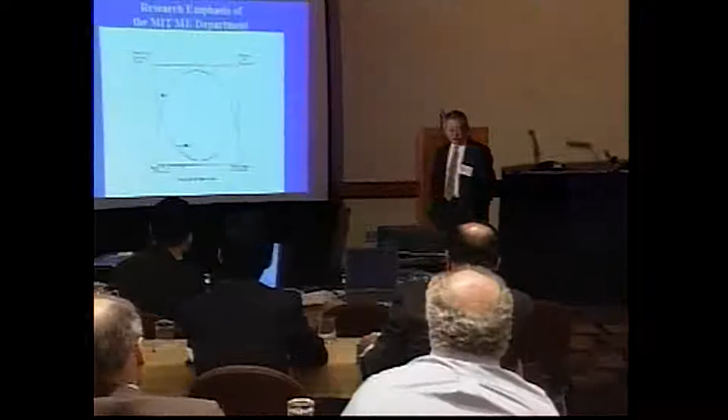One thing I should tell you about is our philosophy about research, which I keep talking about with anyone I can. If you plot a research spectrum on the horizontal axis, and then plot activity level along this axis, this is a research spectrum going from very basic or fundamental research...

You can define it any way you like, and this end is technology innovation, with activity level along this axis. The typical distribution is something like this: most professors and large numbers of researchers are in this middle area—I think 90% of our colleagues in universities are here. But if you look at the impact made by this kind of research, the curve is just inverted.

So I say at MIT, we should concentrate at this end and at that end of the research spectrum. We shouldn't really care whether someone is at this end or that end, rather than argue about what is engineering science and so on. There are all sorts of basic research one can do, and all kinds of technology innovation one can do. Some people are able to do both, some want to stay at one end or the other, and that's fine—let the middle ground be left to someone else.

So I guess one thing we need to talk about is: what is information? It can be defined in many different ways—to prepare these slides I looked up Webster's dictionary and there are many definitions. For the purpose of what I'm going to say, I say information is knowledge that must be added to achieve certain functional requirements. So information can be measured in terms of the probability of success in achieving those functional requirements.

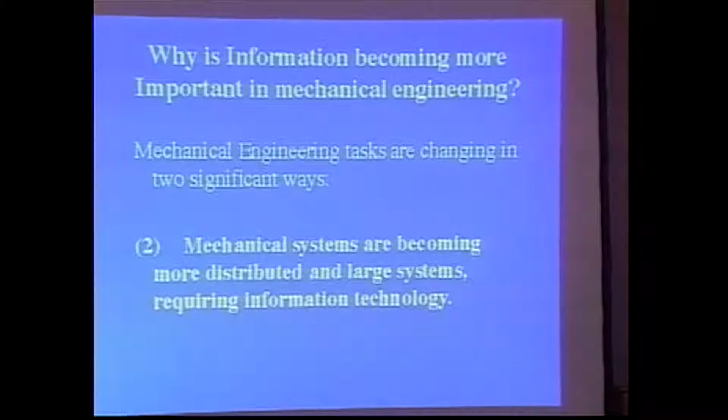The other thing that's happening is at the opposite end of the spectrum. Mechanical engineering is becoming very highly distributed. Factories are located all over. Design is done globally. You have to exchange information, with a large number of people in distant places working together to create the same final output. And that cannot be done without our understanding of networking, without understanding how design should be done in a systematic fashion, and so forth.

It turns out that mechanical engineers always dealt with information. We never called it information. We are always in the area of design and manufacturing. Essentially, these two fields manipulate information to create artifacts. That's the business we have been in, we just did not call them information.

So I'll give you a short, very simple example of how we evolved. In my own research, we evolved by asking some very basic questions, how one goes about designing simple things up to large complex systems, and how it resulted in a complete new technology for creating software, as well as many other things.

It turns out that in axiomatic design, there are only two axioms. One is called the independency axiom, the other is called the information axiom. It requires that the functional requirements must be independent throughout the design process, and we have to define what we mean by functional requirements and so forth. The other axiom says information content must be minimized during the entire design process. A very simple statement. From these, we have a large number of theorems, corollaries, and so on, which can be used by students in coming out with good design.

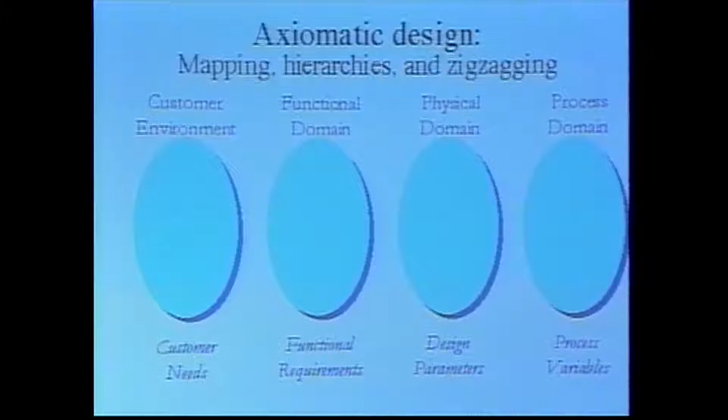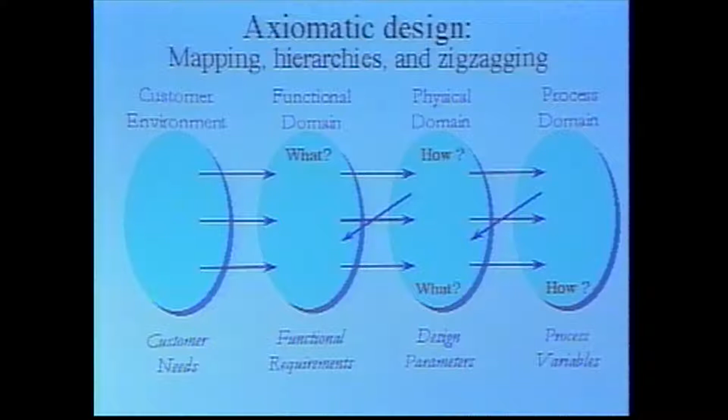In axiomatic design, we talk about mapping from domain to domain. First, we assume there are four domains: customer domain, functional domain, physical domain, and process domain. Then, as a next step, you have to map between the domains, and when you map between the domains, you have to maintain independence of functional requirements. That is, you have to maintain independence from what it is you're trying to achieve, from other things you want to achieve.

Then you have to zigzag and create a hierarchy. You cannot decompose something by staying in one domain; you have to zigzag, so the only way you can decompose is by zigzagging. Then you can create a hierarchical structure in each domain. The independency axiom tells you which are the good designs and which are the bad designs, and it gives you a procedure to follow in your design to satisfy these axioms.

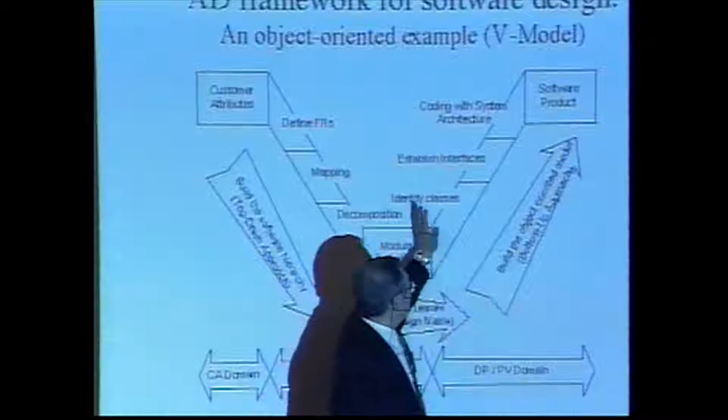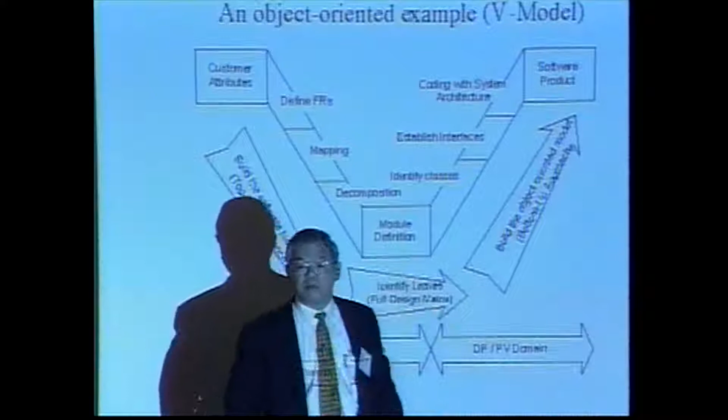So applying this idea to software, it looks like a V model. We go from functional domain to design domain, and that's one leg. Going from design domain to process domain is the other leg in software design. We design along this leg first, and this is typically very equivalent to object-oriented programming. By doing this, we create the structure of an object-oriented program without any human intervention. So you can think of creating software without much human intervention.

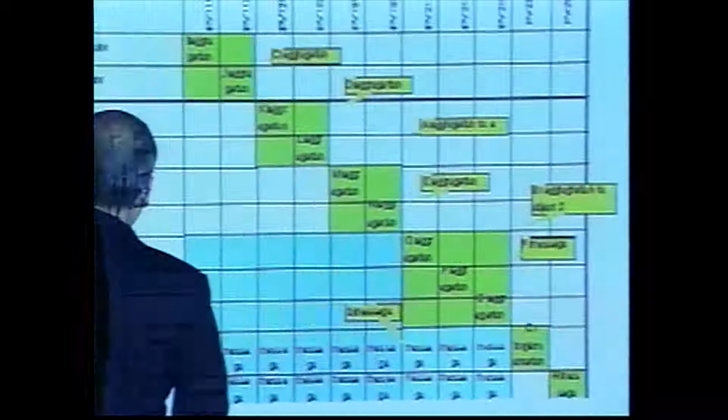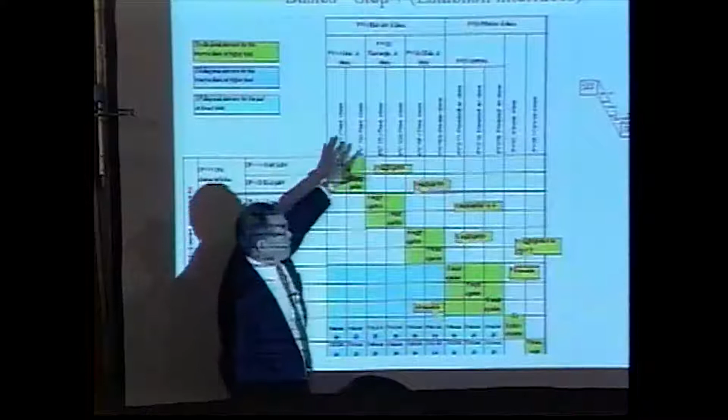As a result of this kind of thinking, as you design, you have a matrix. These are functional requirements, and these could be the design parameters. In this case, we're showing design parameters versus process variables, but you can plot the same thing where this is functional requirement and that's the design parameters.

These are what people might call object-oriented programming. This is what you call an object. That is data, and this is a method. So in terms of object-oriented programming language, that's the way it's going to be.

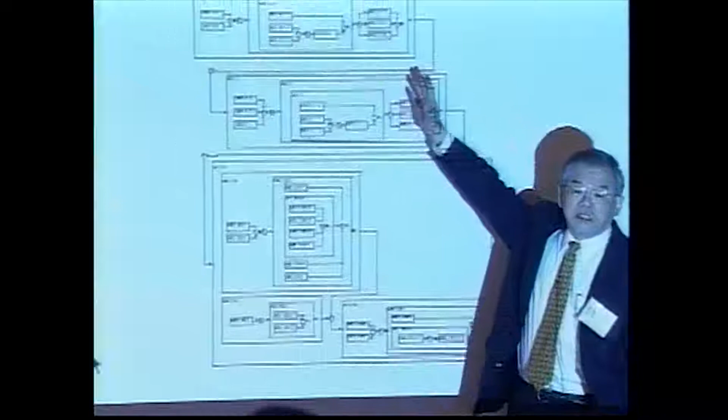So the result of this, without spending too much time, is something like this. This is like an electric circuit diagram. Each one of these little boxes are the modules at the lowest level, and the module we define is very specific - it's a row of the design matrix. The result is a diagram we call a flow diagram, just like an electric circuit diagram - instead of capacitors and resistors, we have these modules.

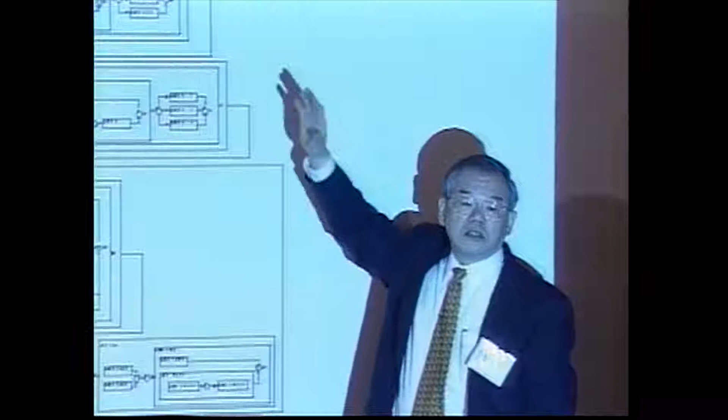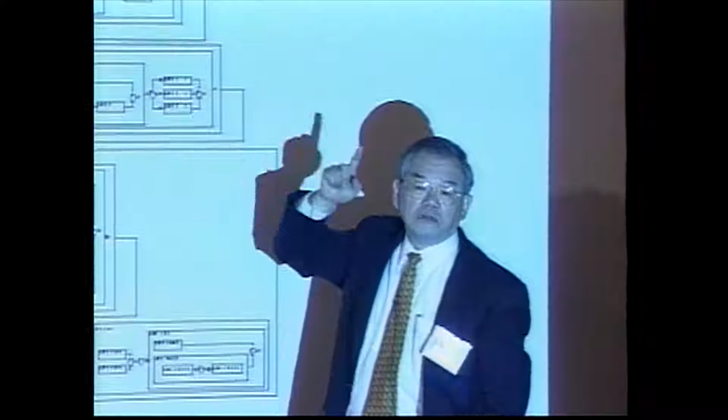It turns out this is generated automatically once you do axiomatic design. With a click of a button, you get this whole thing. Then the only thing the programmer does is stick in the modules. Because this is a row of the design matrix, the programmer who works on this module can be located in India, another in Boston, and so on. All you have to do is stick them in there, just like you pop in resistors or capacitors, and then you have software.

I teach this right now to graduate students in my axiomatic design class. One of the students is a PhD from MIT who worked for Xerox for about 15 years - he came back for a master's degree in the Systems Design and Management Program. I have another student with equally long experience in software design at Xerox. They tell me that the way we did this took only 20% or less of the time it normally takes at Xerox for the software we developed.

They know the software very well because they play with it and work with the people doing this. In the case of hardware design and machine design, I was talking to the president of SVG the other day, Bill Hightower. He really thinks we can cut down the time it takes to develop new machines by a factor of two - what used to take 30-some months, you can do in 18 months or so. So systematic thinking, having a very rigorous criterion for good design, enables us to do this.

The purpose of talking about this is not only to tell you about my own work, but the fact that we started out with very basic research, asking the simple question of what constitutes a good design. Having done all of that, now we can apply it to software design, hardware design - this is technology innovation.

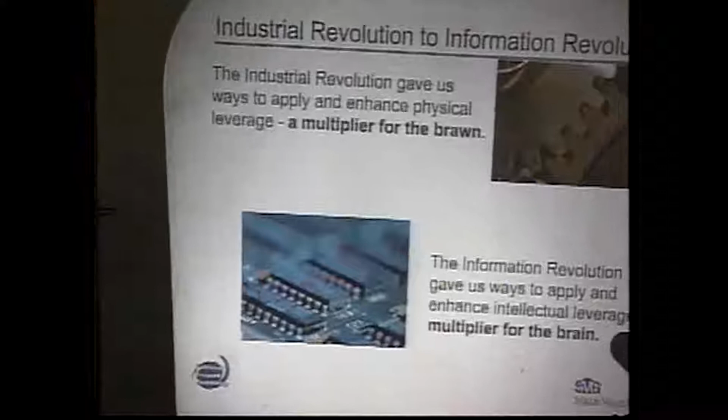In the old days, we really had gears and mechanical engineering, and what we call the multiplier for the brawn. Mechanical engineers basically created leverage so that human beings could lift large weights. Nowadays, of course, mechanical engineering is empowering what we call the brain. Next one, please.

As Professor Lloyd said, mechanical engineering is at the core of information technology today. You cannot make semiconductors without mechanical engineering, frankly. There's some chemical engineering, some material science, and other disciplines, but fundamentally, to get down to the small geometries and really measure a lot of these things, mechanical engineering is at the heart of it.

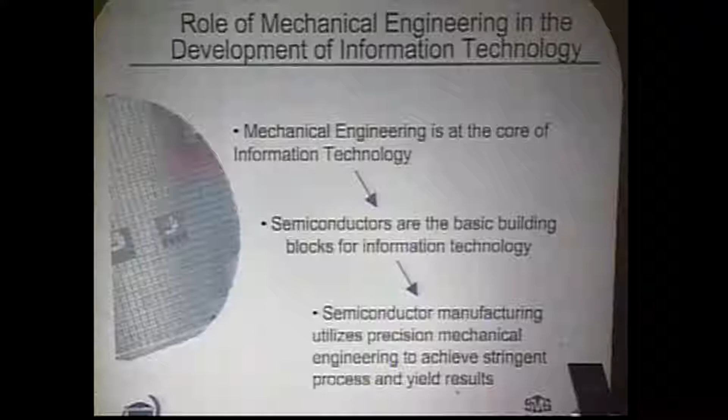Our company, frankly, I will say this: you cannot make Pentiums, since 1994. Every Pentium, most of the Pentiums are built on our machine, and every generation of Pentiums advanced from 120 megahertz up to 1 gigahertz now, the only way you can get that is to make the lines thinner and put more transistors on it. We at SVG are the enablers for that basic technology, and I'll show you how that works. So we are extremely important for the whole internet and information technology.

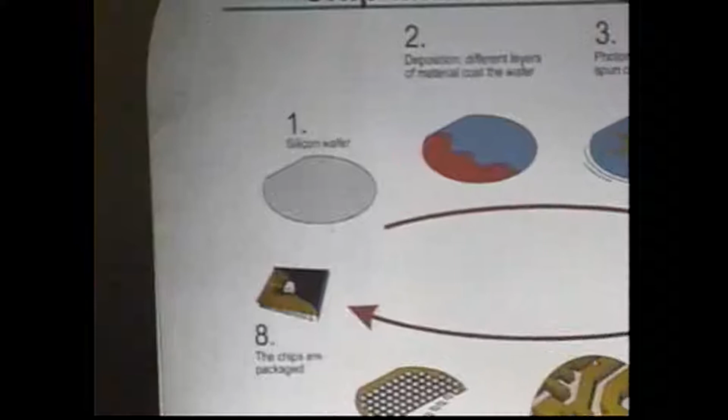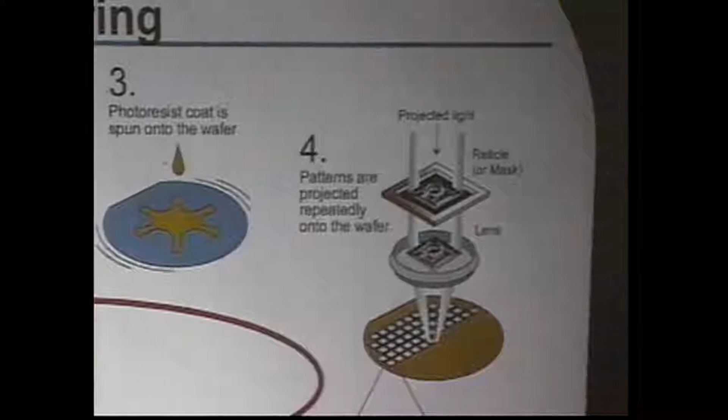Next slide, please. For those who have not followed the semiconductor industry: basically you take a big ingot -- in fact I've seen at MIT a place where they used to grow ingots, and they gave it to IBM. You take that ingot, you saw it first, a mechanical engineering problem, then you spray photoresist on it, which is another mechanical engineering problem. How do you spray something that's kind of viscous smoothly? You've got to get accuracies of plus or minus 20 angstroms, on a 1 micron thickness.

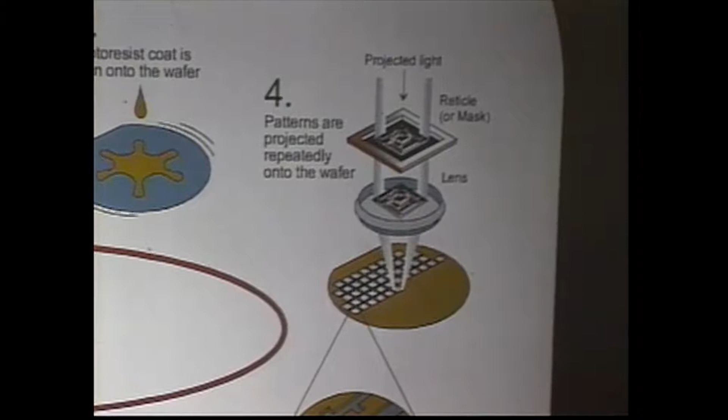So what we used to do in the old days, we used to charge a huge capacitor and suddenly put it on the motor, and the motor really spun it very fast so that you could get acceleration very fast, so that you could really get a good flow.

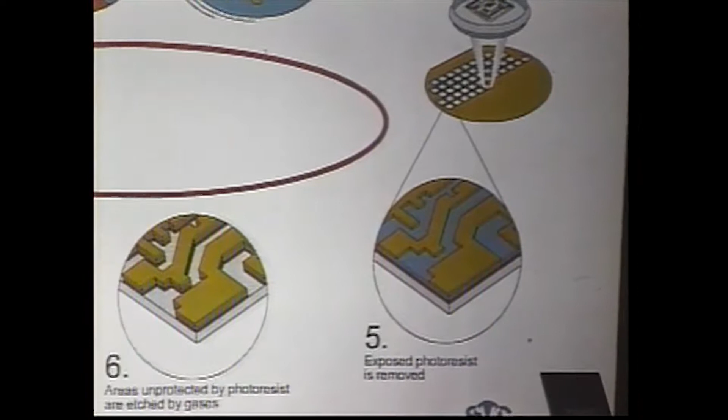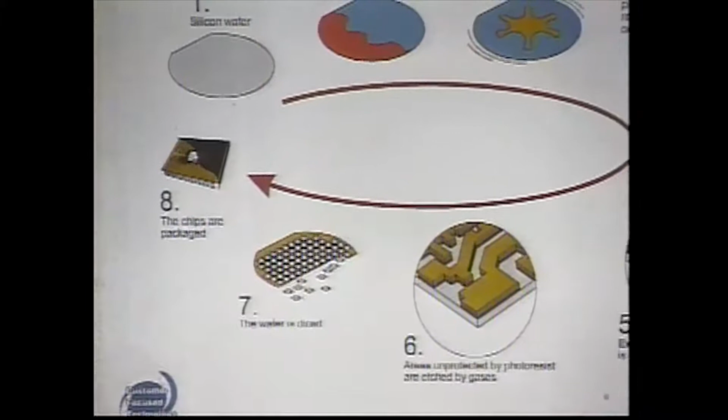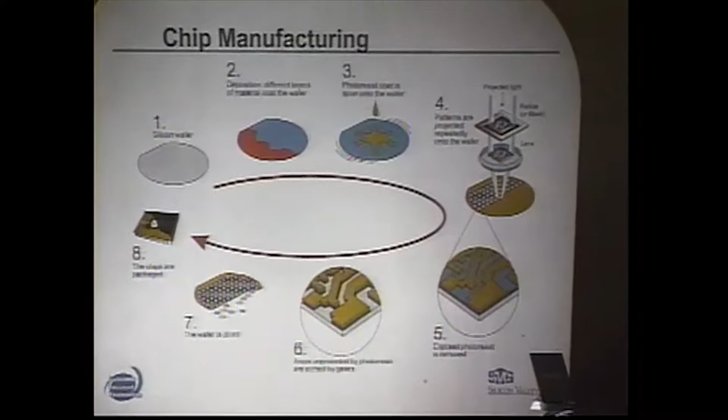Then, after that, you project the image, which is another mechanical engineering piece we make. You have to project real tiny transistors. In the old days it used to be 5 microns; now 0.18 micron is the technology today in production. Then you develop it, and then you etch it, you put some other stuff in it. There's another mechanical engineering piece: we make furnaces where basically it's a heater, and you put some gases in it, and you have to make sure there's no stagnant flow. You have to flow it properly -- another mechanical engineering phenomenon. You make sure there are no particles and you have smooth flow, another area of mechanical engineering. So I really think mechanical engineering goes into all of it.

Next one, please. Lithography, of course, is basically the most difficult and most important part of making semiconductors. That's the ability to put the finest image on the wafer. And if you can't do that, whatever you etch, whatever you develop, whatever you do is nothing. That's the basic enabler that gets to thinner and thinner lines.

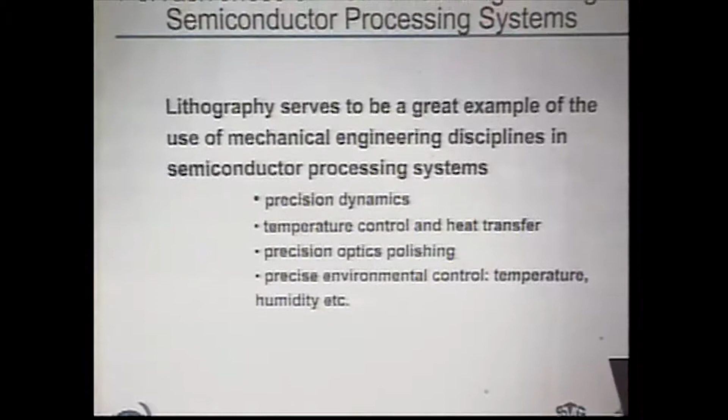And believe it or not, optics, fundamental geometric optics that's taught in 2 or 3 weeks, that's all we use year after year for the last 30 years. So whatever you learn in 2 weeks, maybe you should amplify it a little bit with some applications so people can get better at it. And like Professor Su said, the physics department -- I think that's very elementary, but when you really start using it, really making machines with it, you find out it's not that elementary. Things get very, very difficult.

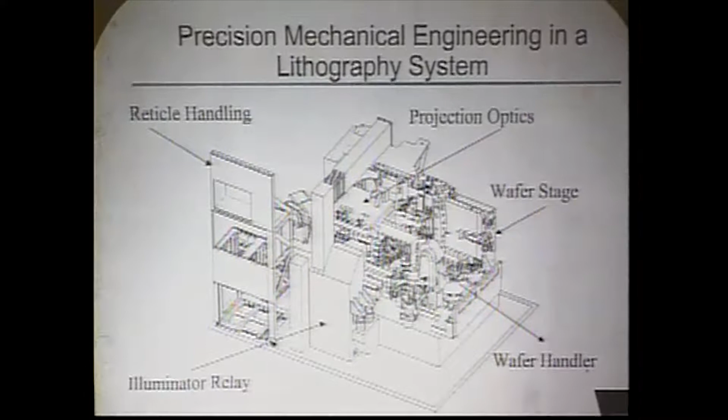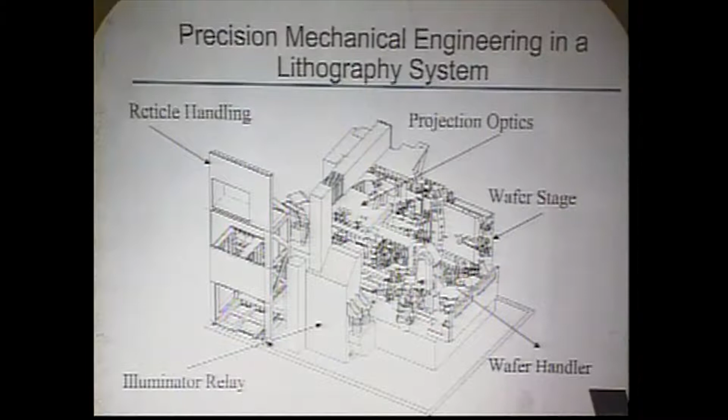Next one, please. This is a sketch of a typical machine. It is amazing sometimes that the damn thing works at all -- frankly, it's just so accurate and so precise. Just to give an idea, we actually print 0.1 micron, and the accuracies are within 0.01 microns. So you have to make machines that measure 0.01 microns, because you cannot buy these things.

And these machines, these carriages have to accelerate. Just to give an idea, these things run about 100 wafers per hour, so about 1.5 wafers per minute. In 60 seconds we have to take a wafer, put it in, take it out, put it in, and then put about 50 or so dies on it, take it out, all accurately, and you have to do this. So these are very, very fast and very accurate.

Everybody can do things slowly. But when you start, you basically have to hit the machine and stop the vibration and do it. I used to make disk drives before at Hewlett-Packard, but disk drives compared to this -- we used to always argue about how fast you can accelerate something and stop it. We found out that when you accelerate something, that's okay, you can get there, but then it vibrates.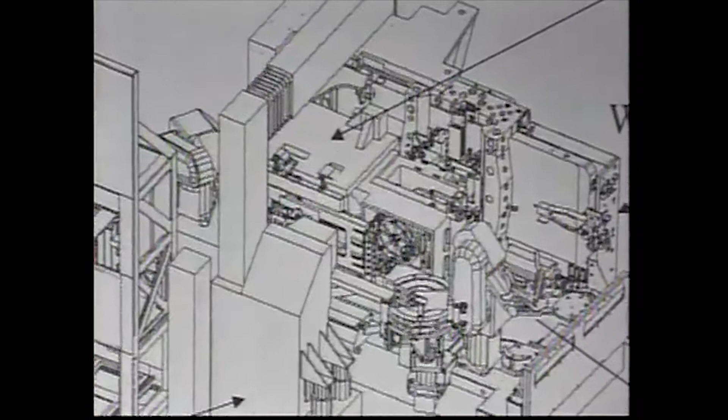So how do you stop the vibration before you can start reading or printing? In disk drives, the settling time sometimes is much longer than the access time. We have to align things accurately, wafer to wafer, layer to layer. You have to do 26 layers on top of each other, and align it within 0.01 microns. The difference between physicists and mechanical engineers is that physicists talk about it, mechanical engineers have to do it.

That's for Professor Lloyd.

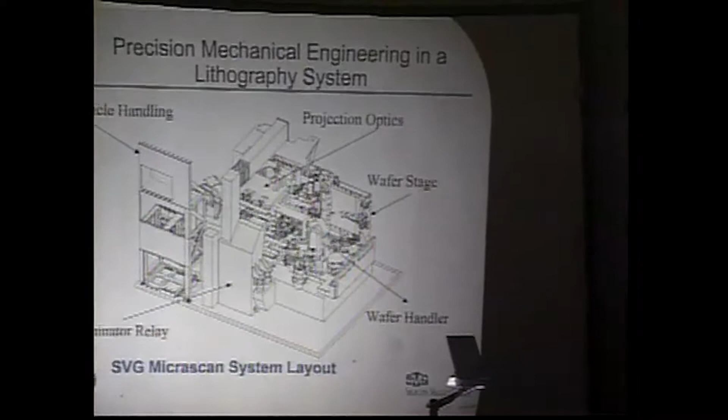These things really have to go. I was at a meeting the other day, and I pointed out that when we went to the moon in 1969, the computers we used were so elementary compared to today's PCs in terms of power. Those astronauts literally had to fly those things with their feel, you couldn't see it very much. It's amazing we were able to do that at the time. The amount of computer power we have today compared to the 60s is just incredible. In 1965 the IBM 360 was invented, so by '69 there wasn't much technology, and PCs didn't come in until about 1981, 82. They were 8-bit machines, very, very slow, elementary.

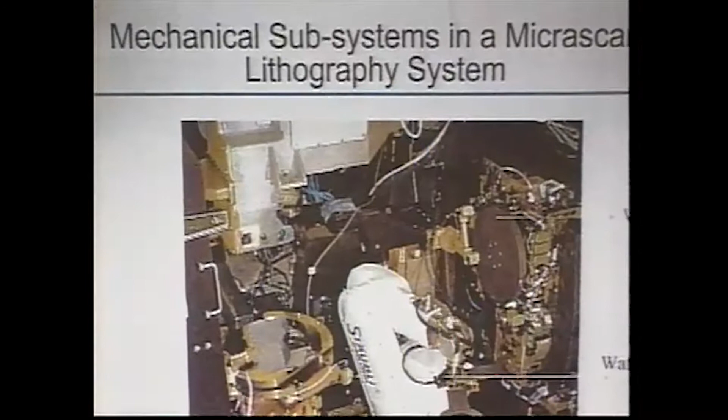So next one, please. This is an actual picture of that schematic diagram where we use some robots. Frankly, these materials have to be very light, very stiff, damped, and very accurate. And we do this actually. Believe it or not, these machines do exist in production. Next one. And they are making wafers every day, and that's what enables the whole information technology.

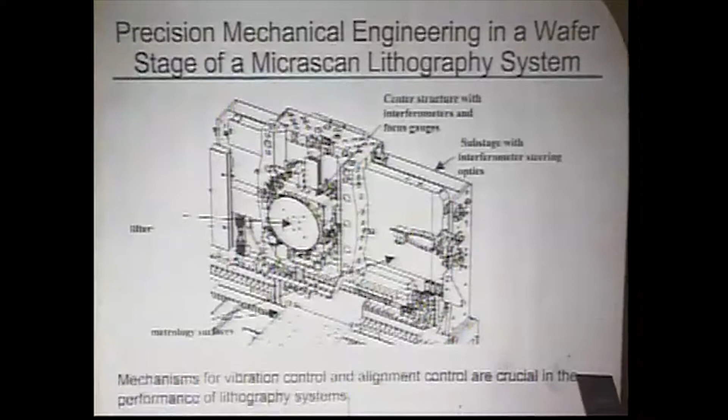There's another picture of what a wafer is. These are 8-inch wafers, and we're going to 12-inch wafers. Handling and making a 12-inch wafer, and making a smooth photoresist on it at 10 to 15 angstrom accuracy, you can see it gets much more difficult.

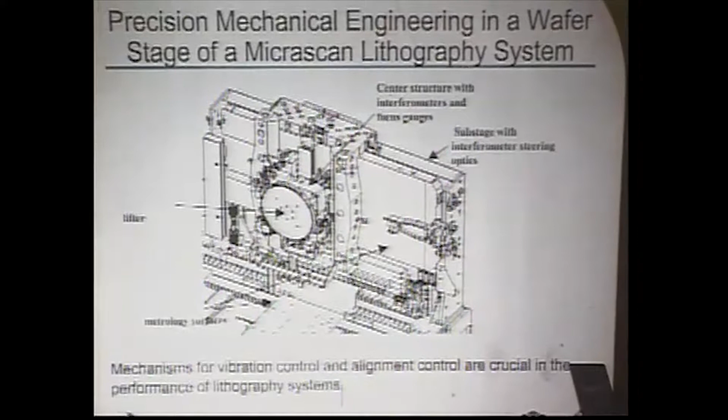We are working very closely with MIT, because the knowledge today is, we don't have all the knowledge, and we really try to tap on the knowledge at the university so we can get the best technology available. I'll show you some slides later as to why it's so important for industry to work with a university today, whether it's MIT or Berkeley, because information is transferring so fast that the days when researchers made something, wrote papers, and 10, 15, 20 years later it went into industry by osmosis or diffusion, whatever it is, is no longer valid. You really have to get the latest technology instantly, and the professors need to work with industry to find out the real applications.

Nam tells me many times when he comes to visit us and sees the machines, he thinks of 10 ideas, and his students and professors too, because a lot of times we're trying to accomplish something and we're in a foxhole, we don't see what's going on. Then a professor or student comes in and sees things we're doing wrong, or that we could do better. That's another interaction that's necessary between industry and university today.

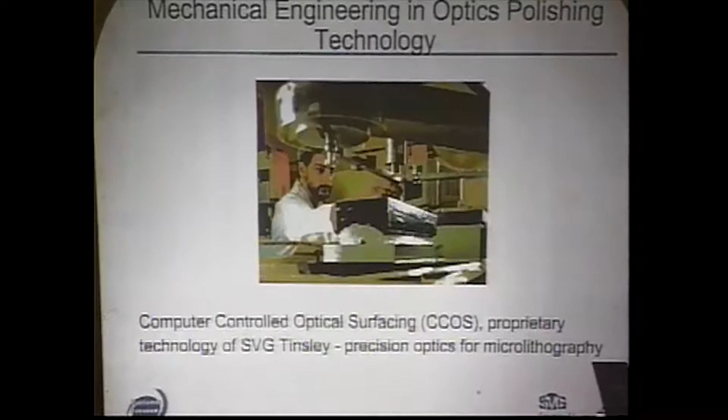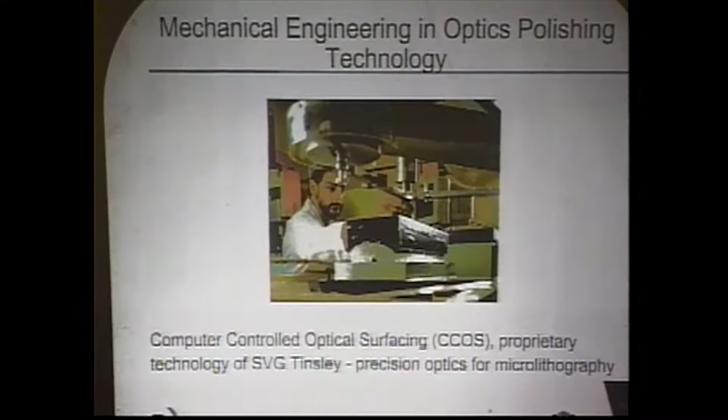And another one. We use optical polishing to 1/300th of a wave. We used to use old German opticians, because we don't even make opticians in America anymore, to really polish these things and measure them. But now, believe it or not, in Richmond, California, there's a company called Tinsley, which we purchased. They developed a computer-controlled method where they are measuring while they are polishing, with feedback. We can do spheric as well as aspheric lenses, and this was really done here, probably the best place in the world where we can actually do aspheric lenses very accurately by computer-controlled optical polishing.

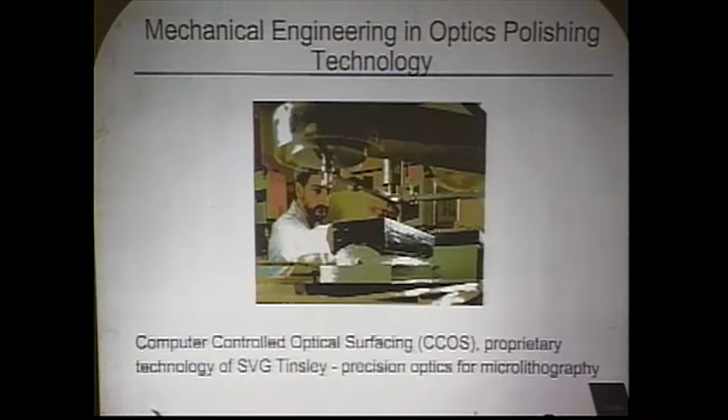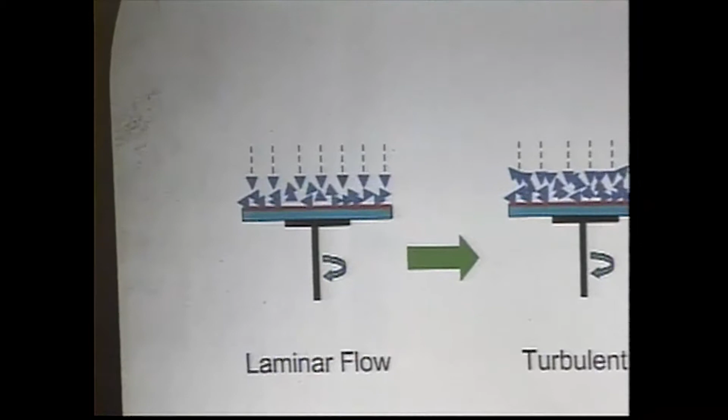Next one, please. This is a picture of how when we rotate the wafer and put photoresist on it, you can see all the flows and pressures that occur when you want to make this thing very, very thin. The reason you have to control within 10 to 15 angstroms is because every chip is about 1 to 2 centimeters square, and you have to make sure every part of that wafer has a uniform flow. Otherwise you don't get the speed, and you don't get critical dimension, or CD, control accurately if you don't have the thickness right, and therefore you don't get good yield. Yield is the name of the game in this business.

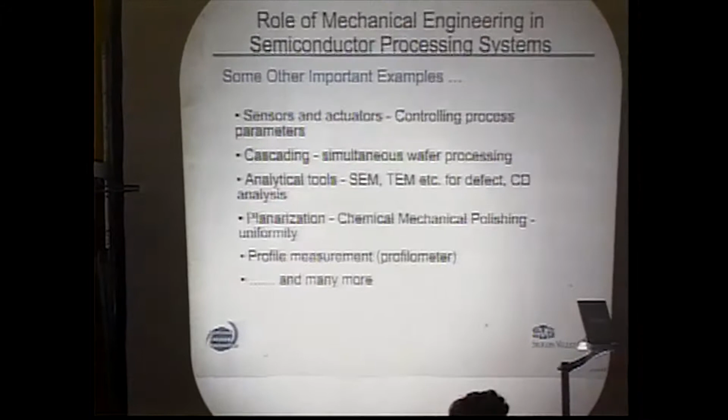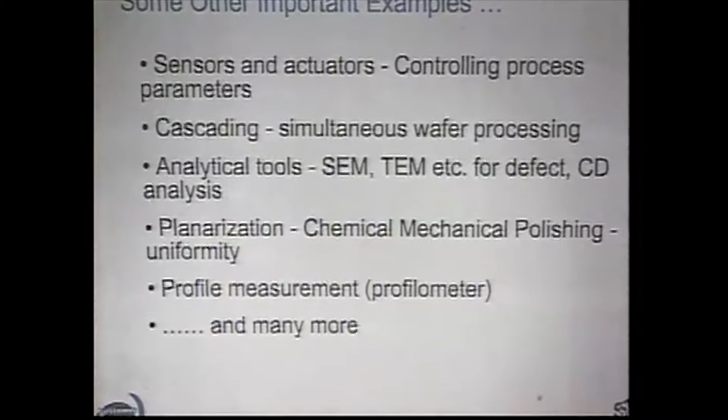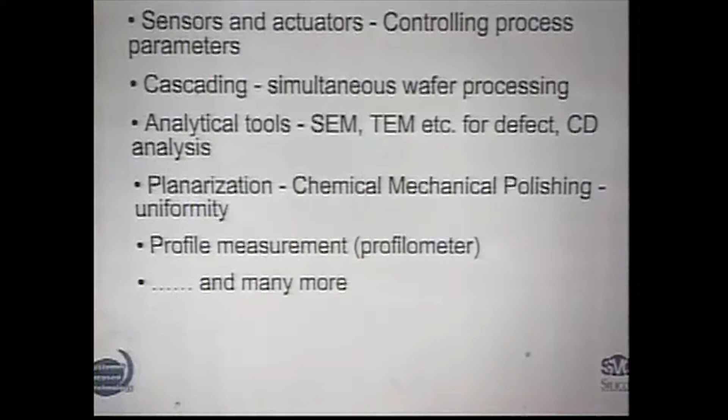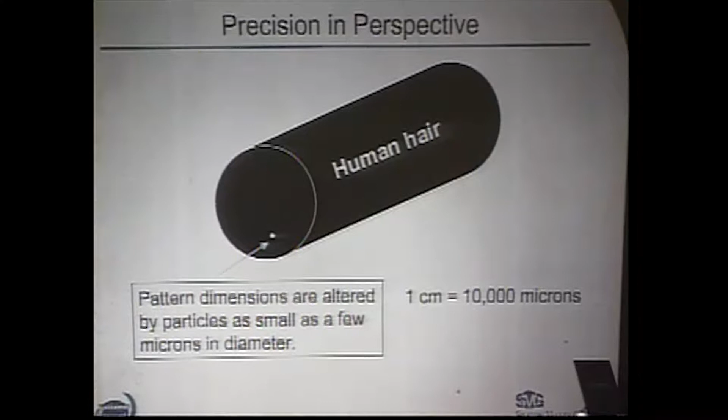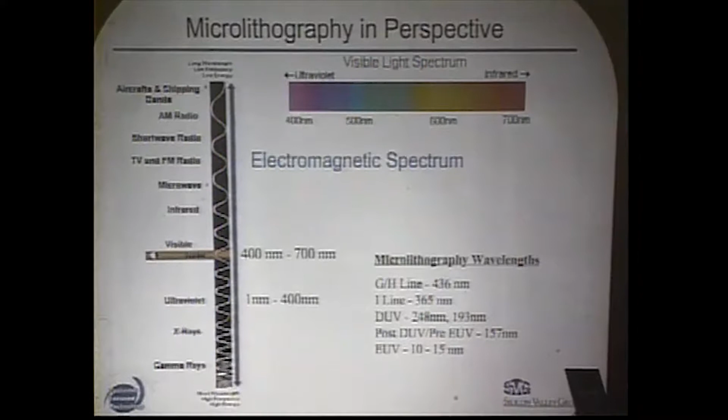This electromagnetic spectrum gives you an idea. Basically the G and H lines are 436 nanometers, and the I line, used until about 5 years ago, is 365 nanometers. We are using 248 nanometers now, moving to 193, and of course next is 157 nanometers. That's basically the source of light.

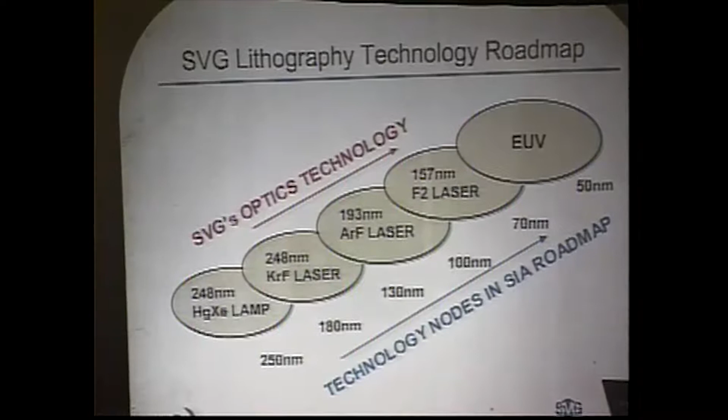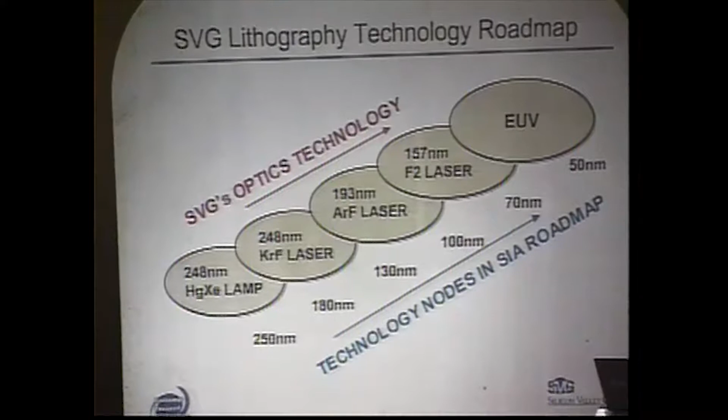As I said, our company is the leading producer of lithography. We really do deep UV, beyond UV, lower than 4,000 angstroms, or 400 nanometers, which is visible light. Then we're going to 193, next is 157, and then EUV. These are all optics until about 2006 or 2008—we're still going to be using geometric optics. People want to know when the technology is going to stop. We're still using optics; EUV can start us considering whether we're going beyond optics. There's a lot of discussion now in universities whether we should move to the next stage—working on human cells or tissue instead of silicon. But right now, I think for the next 10 years we'll be using silicon and optical techniques.

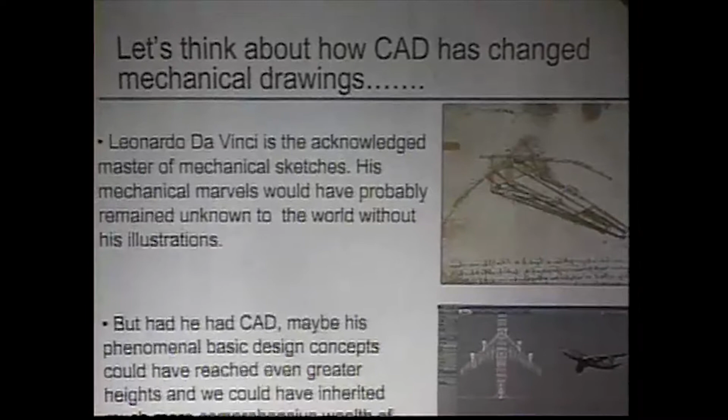As you know, if Da Vinci had computers and CAD systems, you can see that his innovation was not any worse than what we do today, except he didn't have the tools. The tools we have today, like the axiomatic design we use, really speed things up and make mechanical engineering life very easy.

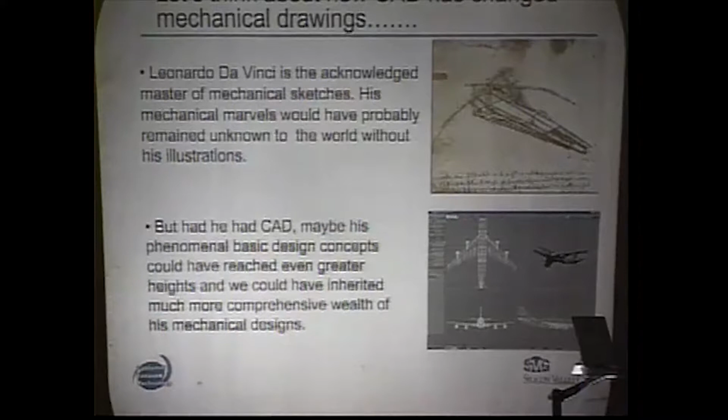For example, when I was designing things, we used to make parts that fit together. Sometimes we made mistakes and parts didn't fit—very simple, the holes were in the wrong place. Today, you can actually do this on CAD, simulate it, and make sure they're in the right place before you build it. Equally, most of you work with software, and software has the same incompatibilities as hardware does. Most of the time, software guys get away with it, selling things that are not finished. Unfortunately, in hardware, you can't.

Your computer suddenly freezes. You put a new application program in, and the damn thing doesn't work. What happens? There's a software incompatibility, but software guys don't admit that—they say it's a user problem. That's why they charge you 15% a year just to maintain it.

But those things can be addressed by axiomatic design. It's really nothing but a replacement for a good engineer—if you have a good engineer who thinks clearly, you probably use axiomatic design mentally anyway. But axiomatic design makes a good engineer a great engineer by showing systematically what you have to do and avoiding potential problems and conflicts.

Like I said, now we are using PCs, we have computer networks, and we're using the internet for sharing data and sharing knowledge. We used to use picture mail and other things through the television, it didn't work. Now we have to use the internet. You can share data online instead of waiting for a long time. Mechanical engineers now use that.

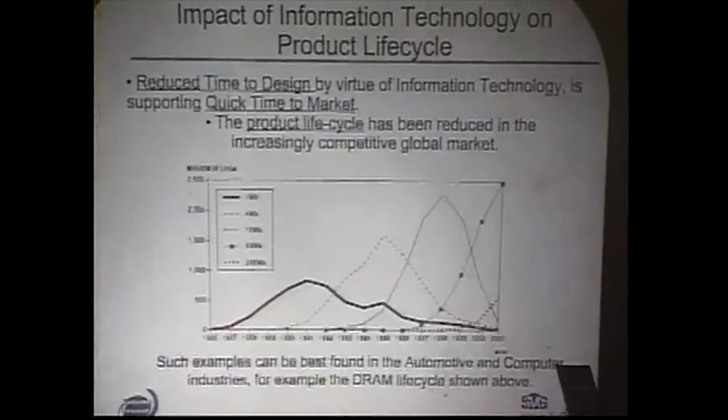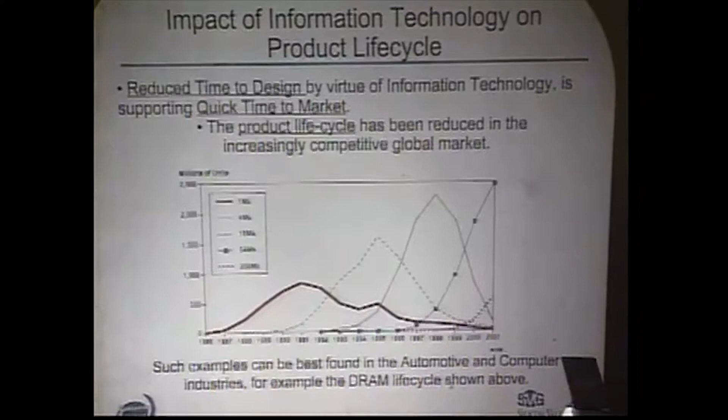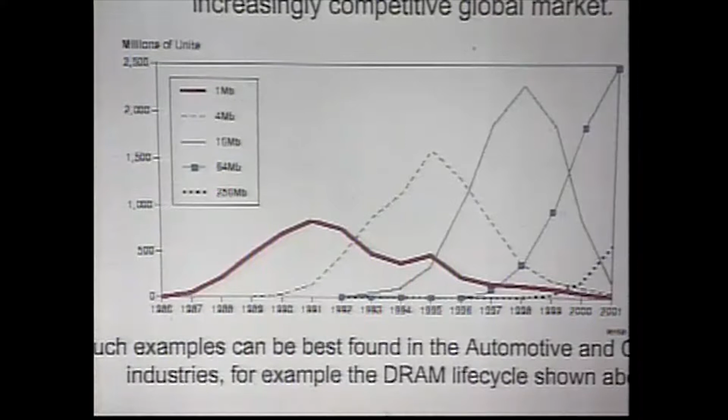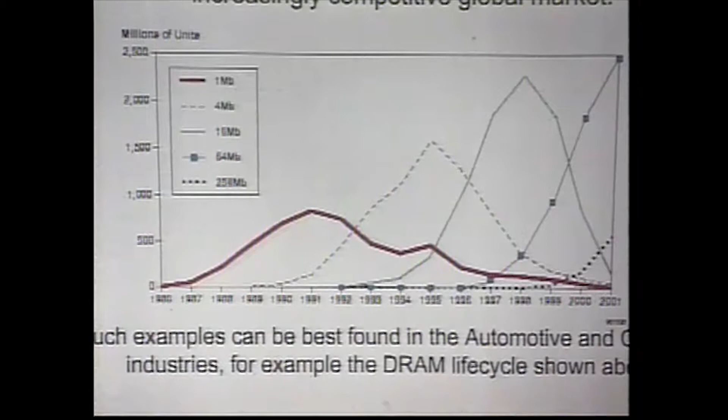I think this is a very interesting chart, and something that all of you in academia really should pay attention to. It shows that for the 1 megabit, the red one, you see how long it took? It took about 4 or 5 years for it to mature, in terms of the number of units. On the ordinate is millions of units, on the abscissa is the years. It took 4 or 5 years to mature, and then almost 10 years to decay.

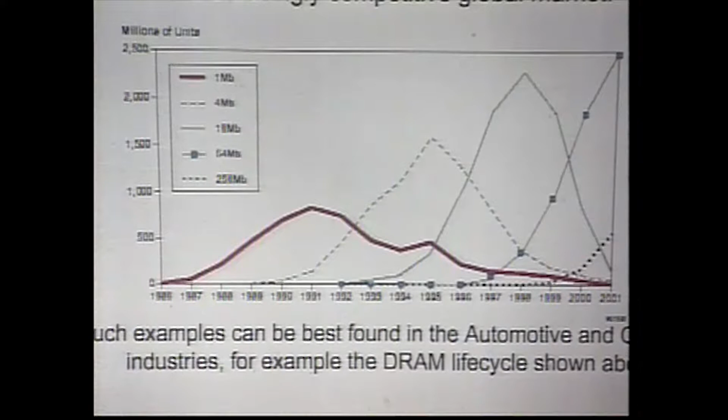But the next generation had a faster ramp, and the next generation after that was even faster. Right now we're at 64 megabit, and it's dying, but look how fast that grew. Now we're going to 256 megabit, and it's growing even faster. What this message really shows, and I have another chart that will show you, is why I think it's extremely important for universities and industry to work together.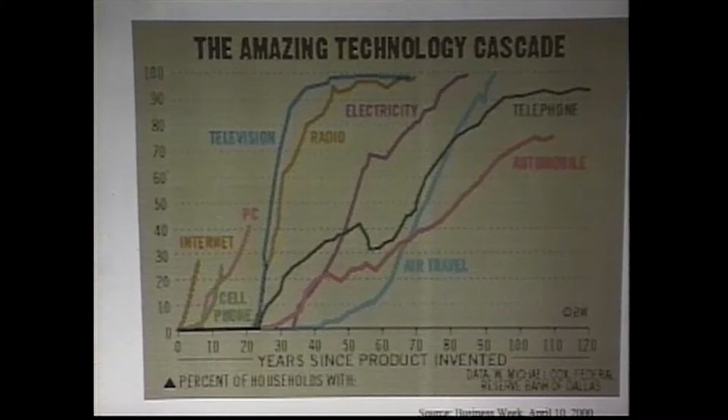You can argue about whether the telephone or the automobile or electricity was invented at a certain time, you can change it by 10 years here and there. But the point is, it took almost 50 to 60 years for the automobile to penetrate 25% of the population. And if you look at the farthest left chart, it took less than 6 or 5 years for the internet to penetrate 25% of the US population. The message here is that things are moving a lot faster.

I think it's extremely important for us in industry and academia to work together, and vice versa, because a lot of us don't have the knowledge, and you have a lot of new ideas and new knowledge. I think we give you a lot of application capability, something to sink your teeth into. I really think it's extremely important for us to establish this collaborative effort.

In manufacturing supply lines, let me give you an example, not even in our industry. My brother-in-law is a vice president of a garment industry. What's relevant about the garment industry to our business? It used to be that Sears, Walmart and all these guys ordered something, got the clothes, put them in a warehouse, built huge warehouses, distributed these things into their various stores, and then sold them. Today, these huge department stores like Walmart or Sears literally have thousands of distributors and suppliers, and they tell them to tag this model, whatever clothes they're making.

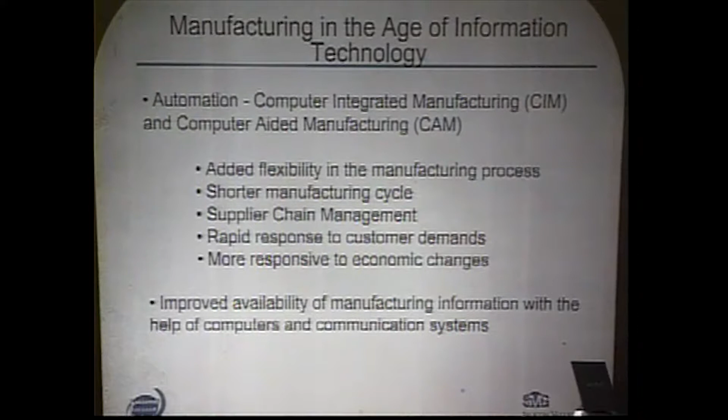In the clothing business, believe it or not, clothing is just as perishable as computers. If you don't sell something for the spring, right now they're working on the next fall fashion, and if the fashion doesn't sell, it's perishable. That's why you get them into all these outlet stores. So they have to get this machine, accept the design, manufacture it, make it in various sizes, put the tags, and send it directly to the store.

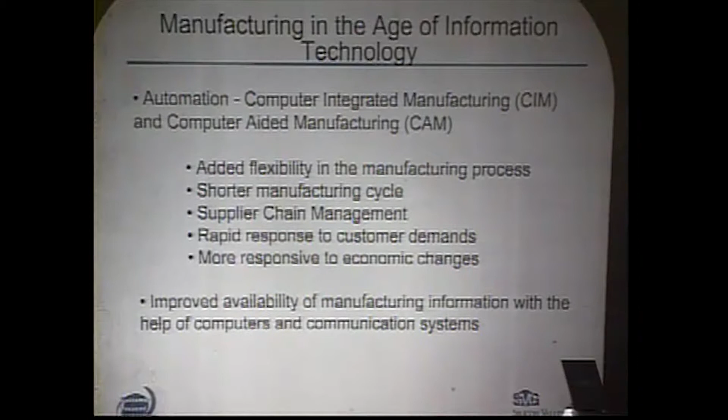And in the store, you have all these new computers now. They even tell you exactly where it came from, and every day they look at how much they are selling. Within 2 to 3 days, if they didn't sell that much, they take it and send it back, or if it sells a lot, it automatically reorders. Even as mundane an industry as the clothing industry, the whole information flow and speed of operation is happening. So we in mechanical engineering, in manufacturing, we have to do the same thing.

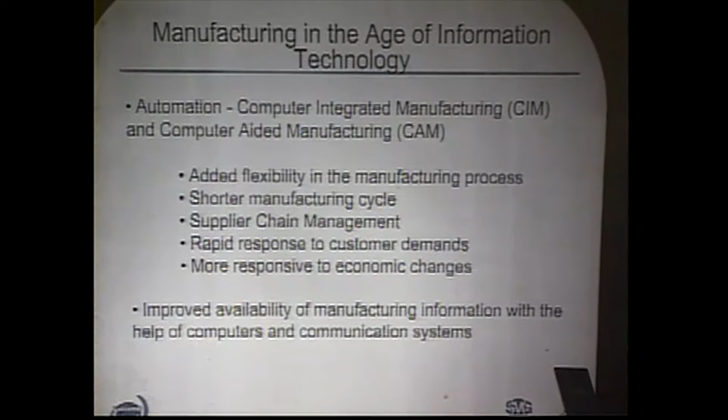We really have to improve our process lines and process systems. The days when you designed a part, went to the machine shop, and 3 months later got it back wrong, and had to get it again, that doesn't happen anymore. You really have to do things accurately and very, very fast.

Another area is mechanical engineering reliability. You cannot do things the way we used to. When I came to this industry 15 years ago, our machines probably worked about 150 hours a week. One week is 160-some odd hours, and the way they looked at it, if the machine lasted a week without anybody touching it, they were okay.

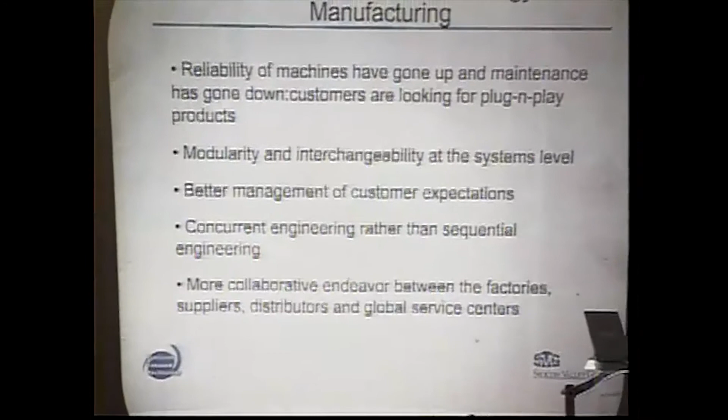But when you are going into a lights-out, automated factory, and you have 500 steps to make a semiconductor, with a lot of different, complex machines and processes, you want a lights-out factory without people, because people contaminate the circuit. You have to have reliable machines that have to work, and uptime suddenly has to go into thousands, not hundreds, of hours.

These complex machines have to work reliably, and what better field than mechanical engineering to really make these dynamic systems reliable. All these probabilistic theories, and you have to design things properly. It's extremely important. You cannot get automation without reliability.

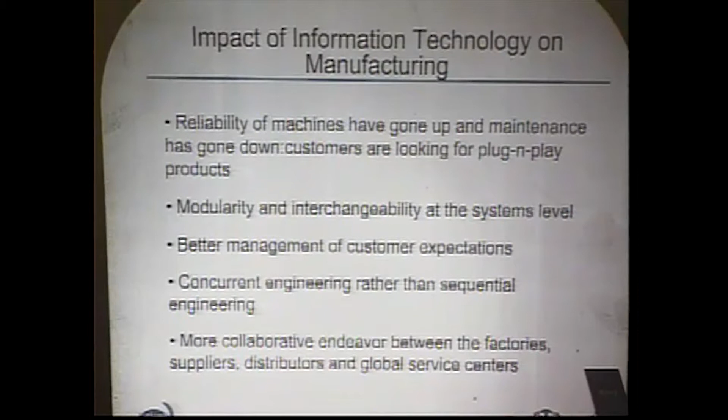As you know, with the jet engine, if you had an old airplane engine, every few hundred hours you'd have to really fix it. Jet engines last 12,000, 15,000 hours between overhauls, and you very seldom hear of a jet engine failing in an airplane. You just take it for granted today because of mechanical engineers. Those are the guys who were teaching at MIT when I came here.

The next one, please.

I think all these diagnostic systems, internally for self-correction—right now we're designing machines so that instead of sending technicians all over the world, we can actually diagnose them remotely, get the information, and immediately feed it back to the manufacturing floor. These are all systems that the new information age is helping mechanical engineers get to faster. In the old days, you had to bring the part in and spend a whole job analyzing it. But today you have to do it faster.

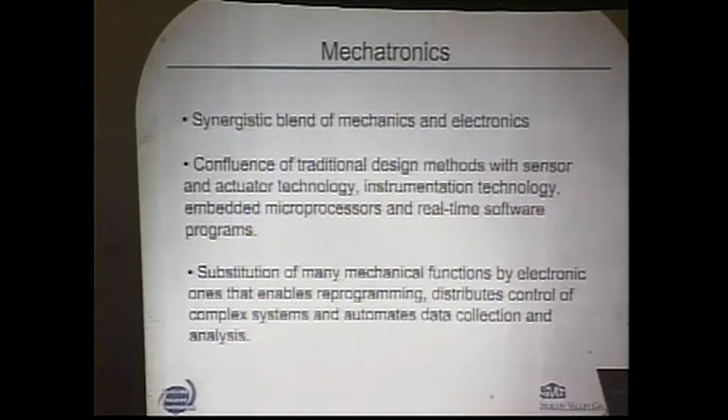And I think there's a professor too, I'm sure, who teaches mechatronics—the whole system of traditional systems working together with new ones.

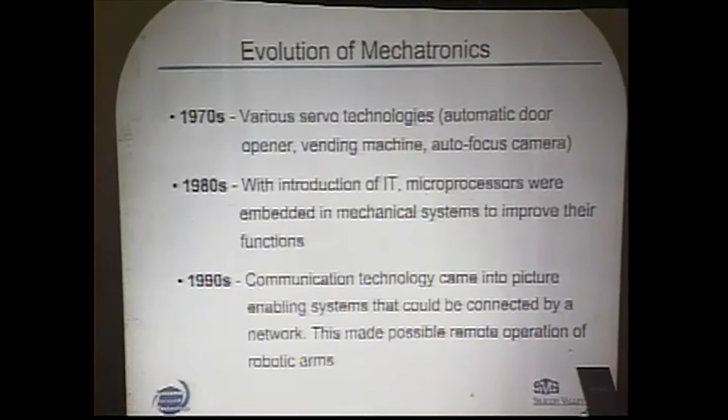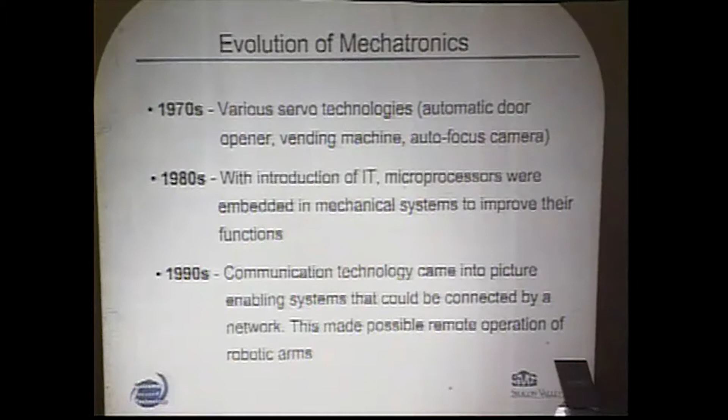In any case, in the 70s we had servo technologies, then in the 80s we had IT technology. Now I think we have the entire confluence of all these systems, actually using feedback systems and technology to really get our job done better. So that's what you have to really teach.

Next one, please—that's a complex chart, basically. I'm sure most of you can draw your own chart, or you can use this one when I send the email to you, showing the general field of mechatronics, which combines a lot of disciplines into one, what we call mechatronics.

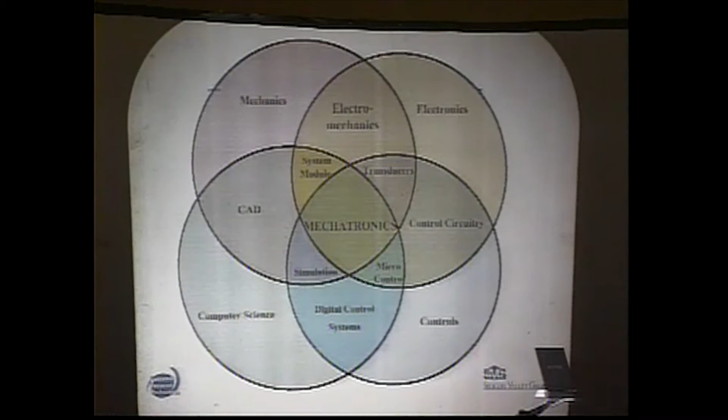Next one. Just to give you one slide—I don't want to slight the people who work in bioengineering. I really feel you can spend a lot of time on that, the next field of bioengineering. I'm very pleased that MIT, under Professor Suh's leadership and Neil Pappalardo's chairmanship, adopted the concept of creating a very strong bioengineering field at MIT, because I really feel that's the next horizon for us to conquer, as to how we can understand this complex body that we have.

You know, I always say God was a very good engineer, because every time you look at the body and the way it works, it's amazing. So I think if we understand it and measure it with mechanical engineering principles, and use some of that to really influence and correct it, we probably don't have to just practice medicine—we can actually do medicine. Basically, next one.

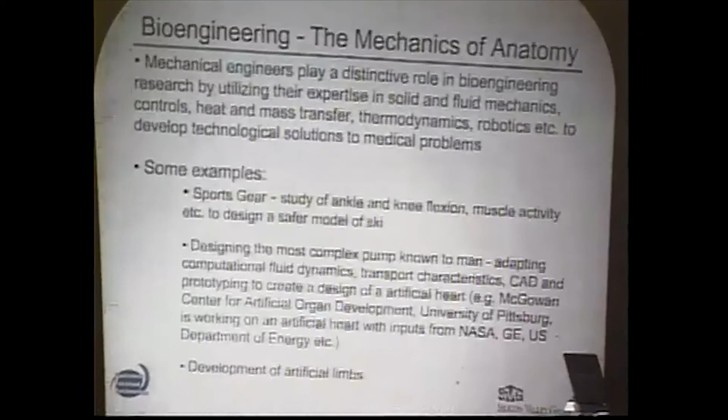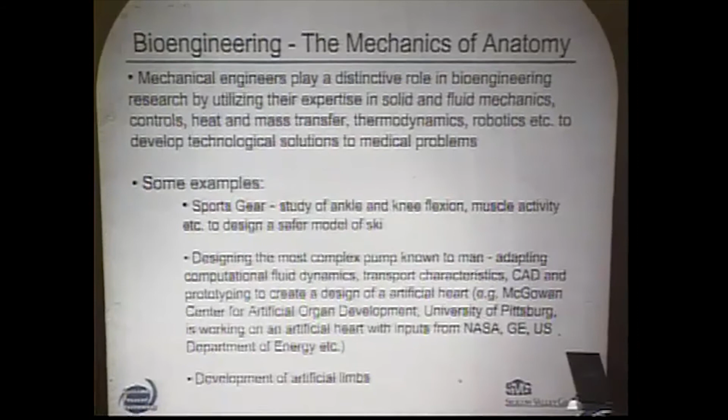So basically, these are examples—you know, we always think of sport engineering and other biotechnology as bioengineering, but basically mechanical engineering deals with pressure, temperature, flow, and all these things we have to use. That's it, thank you. You can take that slide out.

So I just want to let you know that mechanical engineering is at the heart of things, and I think the job here is to teach very basic principles and teach people how to learn as they adapt themselves. Like I said, I was the only mechanical engineer at HP that was accepted, but now, of course, things are a lot different, and they realize that mechanical engineering has a huge contribution to the IT industry. Okay, thank you.